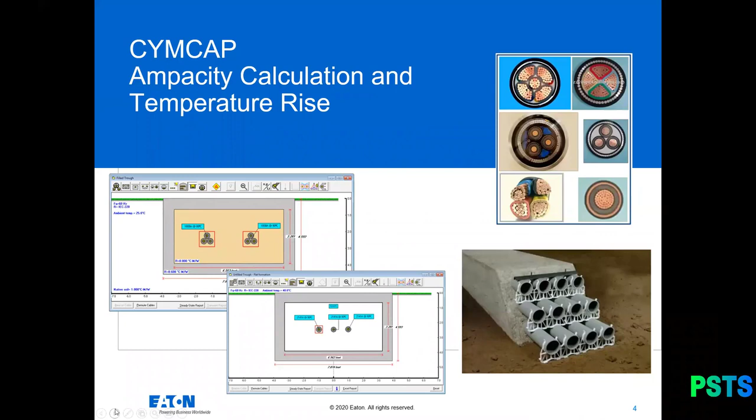Okay, so that was all for the introduction about CYME. Now let's talk about CYMCAP and dive into this topic. CYMCAP is our catalog software dedicated to ampacity calculation and temperature rise.

So, in brief, to talk about CYMCAP, what is the purpose of CYMCAP? Well, the purpose of CYMCAP is to be able to accurately model a power cable and the installation of that cable and the environment, to be able to make a proper calculation of the ampacity of that cable, the ampacity rating.

Why this is important is because it's important to understand that CYMCAP is based a lot on thermal analysis. We're looking at heat transfer, heat transferring from a conductor, a metallic element, which is going to have current flowing through it. And as we all know, any conductor is producing heat. As long as we've got electricity through it, heat is being produced. And as we also know very well, heat is the enemy of performance for any electrical component in the field.

That's really the base of this. We want to know how can we optimize the rating of our cable without reaching the temperature limit that is being set by the problem. So maybe we start with a temperature limit, and then we will look for current, or we have a current value and we want to understand what's going to be the temperature at the end of the problem. CYMCAP can play with those two parameters.

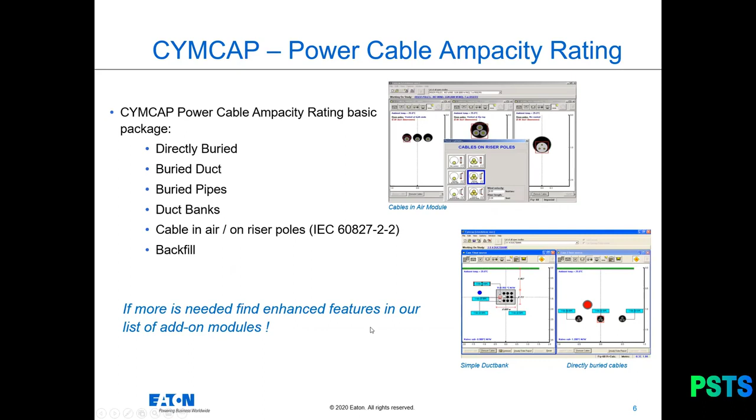So the base module of CYMCAP, pretty much we have this range of installation, which is the simplest, what we call those standard installations, from directly buried to backfill, including cable in air and so on. And I'll show more in detail afterward.

So let's take a step back and look at what is the purpose of CYMCAP again. We're emphasizing on that. What is cable ampacity rating? I'm sure many of you already know, but anyway, ampacity rating. So ampacity, that's a current, okay? And what are we looking at? We're looking at what is otherwise called current carrying capacity.

And really, when we look at a steady state aspect, we're looking at what is the max current that my cable can withstand before the max temperature is reached. So that's a simple problem in a way. At least it's pretty clear. We have a power cable, and we know the limit of temperature because I've got the cable manufacturer data sheet, and it tells me what is the temperature limit based on what my insulation layer or whatever is next to the conductor could withstand. And that temperature might be 90 degrees maybe.

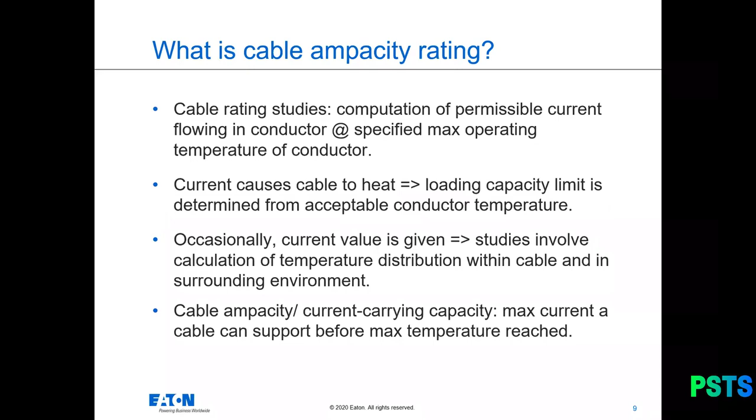So I have this data, and I want to know how much current I can have in my cable before reaching this limit. Sometimes I can look at the problem the other way around - that's something we can do in CYMCAP. Occasionally the current value would be given, so I know, oh, that specific cable, I have to run 250 ampere inside of it, but I want to know what is the temperature distribution within the cable and in the environment, because maybe my project has certain considerations - I cannot heat up the soil around the installation too much. So that's really the main purpose of CYMCAP.

What are the factors affecting cable ampacity? Well, mostly there are three things. First of all, cable construction.

As always, when you do modeling, it's a simulation - it's an image, a picture of the reality. And we need that picture to be as accurate as possible if we want the solution of the problem to be accurate as well. So of course, that's where the challenge is most of the time, is getting your base element of the simulation to be accurate. So the first thing you need to deal with is cable construction.

In CYMCAP, you have all the capabilities to build your cable: single core, 3-core cables, all types of layers. You can add other layers, you can make custom material, things like that. So there is a capability to have an accurate cable model.

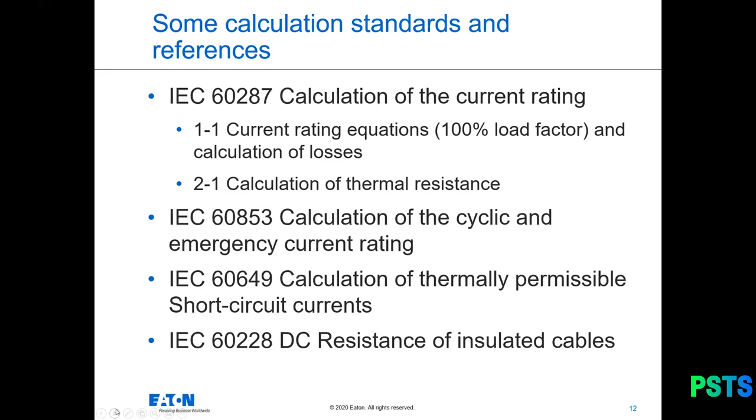And then a few others, talking about emergency current rating, short circuit, DC resistance, and so on. So I invite you to refer to the detail of those standards if you have interest. Like any standards, they are big, thick documents with many pages, so enjoy the read.

And also as a reference, some IEEE standards as well, talking about standard power cable ampacity tables. And also, we have a few papers and books that serve as reference for some of what has been implemented in CYMCAP.

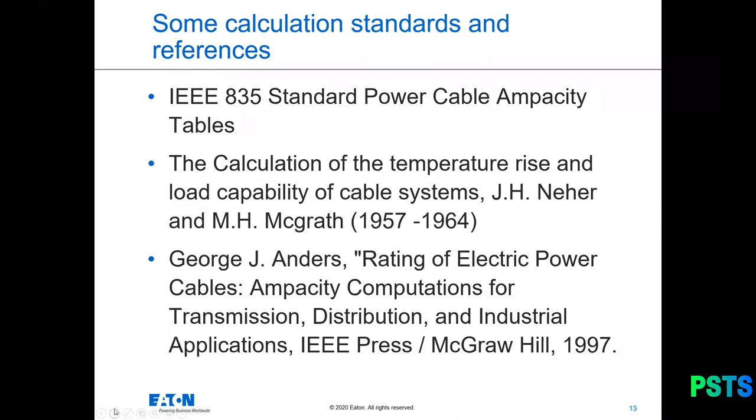And interestingly enough, especially for that third point, Mr. George J. Anders, who is one of the key persons really, and who's been a very important contributor to this science around power cable ampacity calculation. He's actually the person who worked first on the engine of the CYMCAP software. So he's at the origin of the product, and he's still involved with us, with CYME, to help us keep improving the product. So we have some very good references and solid contributions to make sure that CYMCAP keeps being ahead in terms of innovation.

One thing I wanted to mention, which I think is also interesting for all participants to take a look at whenever they have the chance. One of the most recent cases of validation of CYMCAP—because of course CYMCAP is a modeling software, and like any modeling software, the question is always how accurate is the result, how am I guaranteed that I'm actually calculating the right thing? That's a valid question.

CYMCAP from the start has been validated against measurements in the field. We already have a few utilities we've worked with in the past who have compared the results of CYMCAP with actual field measurements—checking what current versus temperature CYMCAP predicts, then going to that very cable, measuring the temperature and current value in the field. That's the best way to verify.

This has been done from the beginning, but more recently, if you're familiar with Cigre, the Cigre B1.56 working group came up with a publication—not yet officially published, but I think it's coming soon. It's basically a document discussing a set of 11 case studies, covering medium voltage and high voltage AC and DC cable systems for land and submarine applications. CYMCAP has been benchmarked against that study done by Cigre.

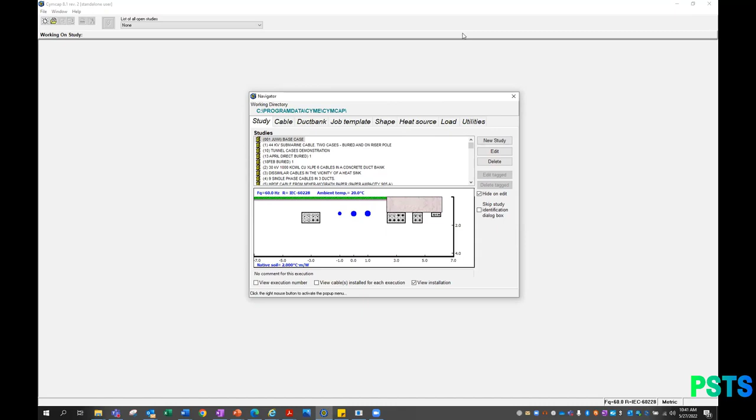When you open CYMCAP, you get this navigator that pops up on the screen—that's the one you find here, the open folder button. The navigator has a few tabs which contain all your database: the database of studies, where you have all the different scenarios you've been modeling and saving.

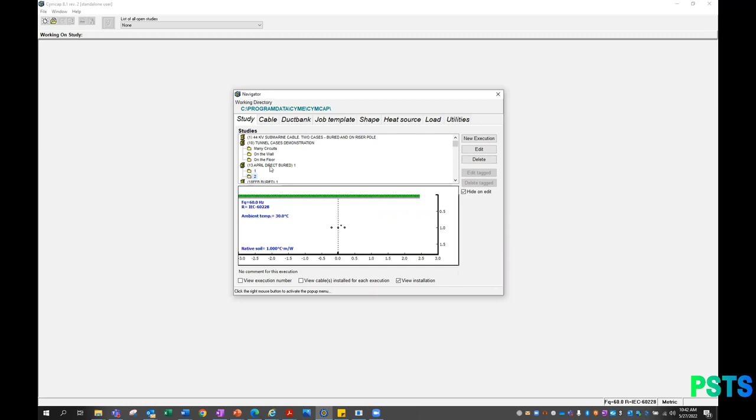In CYMCAP, how it works: we have a two-layer system where the main folder is called the study, and the subfolders are called the executions. You can have as many executions as you want under one study, and save your different types of scenarios for your project.

The next tab is the cable, and the cable is very important because it's the first thing you should work on. Needless to say, if your model of cable isn't there, you're not going to be able to start an installation or begin an analysis. You have to start with the cable.

You will see in CYMCAP that there are already cables in there, but it's not a complete database for all cables in the world from all manufacturers—that's just not feasible, since there are also a lot of custom-made cables for certain projects. But there are plenty of cables here, different voltage levels, single core, three core, all kinds of cable types, which can be used as a reference.

If you start with a cable and feel like, I've got an 11 kV cable that's quite similar to that, you could use this model, duplicate it, and create your own cable by modifying it, or start from scratch. Either way, that's the prerequisite—modeling your cable. Later I'll show you one example of the steps involved in modeling a cable. Though I'm not a cable modeling expert, I'll try my best to go through all the steps.

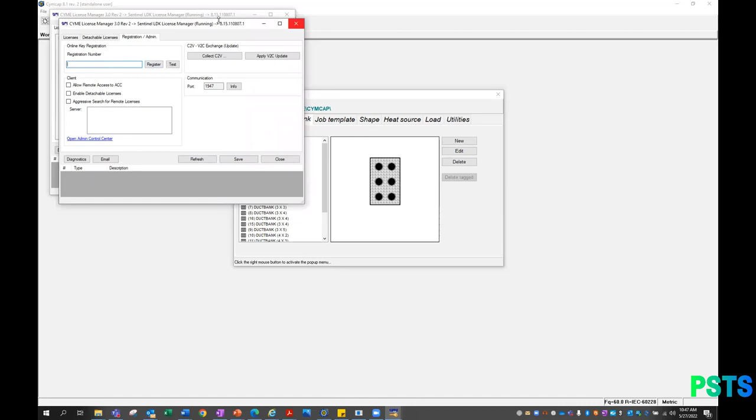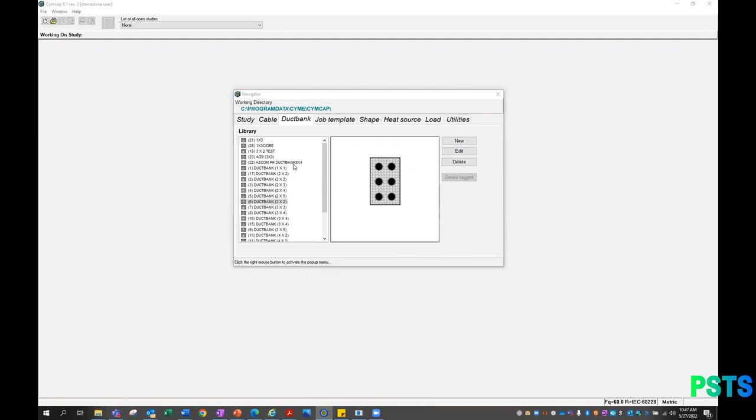So again, this duct bank tab is for defining duct bank, the geometry of the duct bank. In actual fact, anything that's material, type, filling of the duct, that kind of thing, you can define it later into the installation that you design later.

The job template is for the multiple duct bank module, where basically we define installation with different backfills, different duct banks, and we can save it as a template to reuse in other projects. So that's exclusively for people who use the multiple duct bank module.

The next three tabs, we're talking about transient analysis. I'll comment a bit more about that later. But basically, with transient analysis, we're no longer looking at steady state. Steady state is where we just run current in the cable as long as possible until we see the temperature limit, and that's it. We're reaching a maximum, and that's our solution.

But with transient, we are looking at a profile over time. We're looking at what happens if the current in the cable follows a certain profile. Maybe the thermal behavior, and the temperature, will also follow a certain profile, and maybe not reach the temperature limit, or maybe reach it, but just for a short amount of time. So that's what we want to do with those.

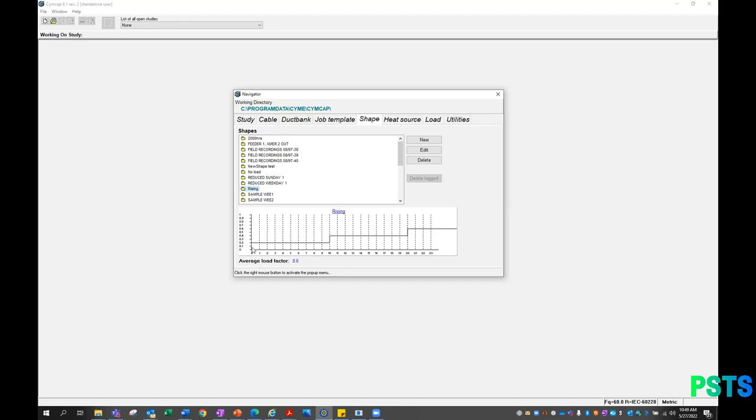We want to define shape in CYMCAP, and shape is basically just a profile over a certain amount of time with a per-unit value, a load factor basically. And those shapes can be combined in different portions to create a load profile, a different load profile. As you can see at the bottom, we can see the whole picture of the load profile, depending on what you're looking at.

If we do a load profile, it will be a current profile, so I want to say what is my current through a certain cable. But we can also do heat source, because we want to see a problem where if we're looking at a heat source in the vicinity of the installation, that heat source also has a profile. It's not always 100 degrees continuously, it might change over time.

So there's capability in CYMCAP to look at transient studies, to really look at what happened if I've got a different profile over time. The Utilities tab is all about where you save your data, quite self-explanatory - your main directory, your backup directory if you've got any, your append if you want to take a piece of database and put it into this one.

And you can also, with that tag mode enable here, if I click here, I have a location that appears here, this copy tagged to, and I can start selecting different elements in my database - model of cables, duct bank - and when I go there and apply, it just extracts that piece of database, not the entire database. So it's quite good to be selective.

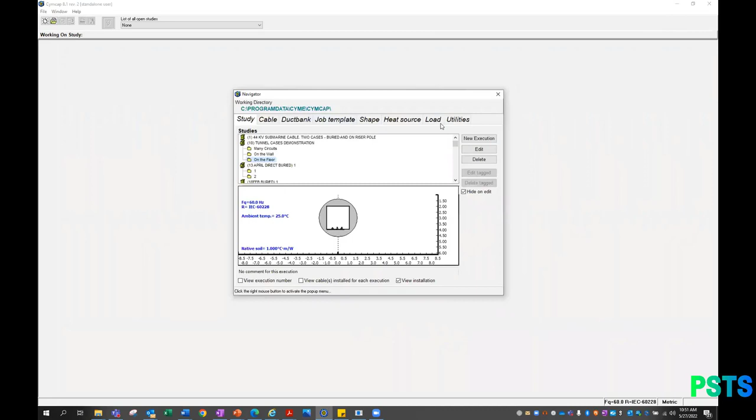All right, so yeah - can you open again the... yeah, I think I need to explain again, comment a bit. Okay, no problem.

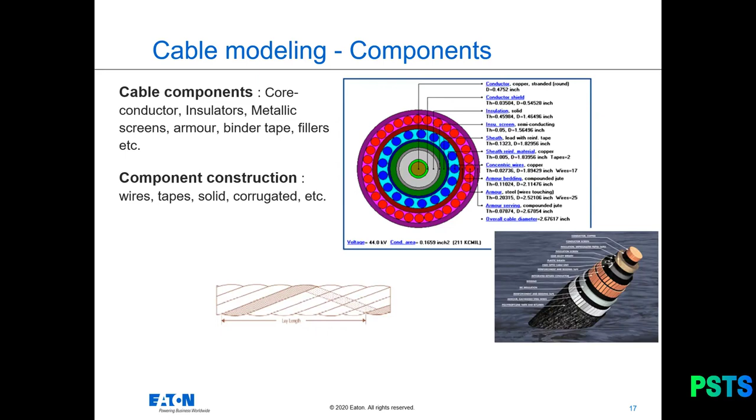And so this is very complete. We even added in some of the recent versions the capability to add more non-magnetic layers. So, for example, some of the cables that some of our users had, have more than those typical layers that we normally see in most cables. They had some additional tapes, additional small layers. So we have the capability now to put even more additional layers. Really very complete capability there.

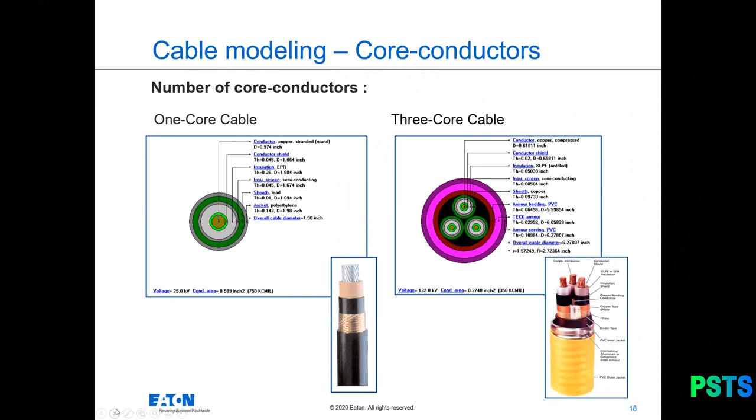So again, we can do a single core cable, can do 3-core cable. We can model different types of conductor constructions - stranded wires, round or shaped, etc. Pretty much very complete. All types of cables and conductor shape and design can be modeled.

And in order to really show you that better, we're now going to jump into a specific example. Before I do that, the example I'm going to challenge myself to show you today is this example here.

So we are looking at this single core cable, and the data sheet here - that's the data sheet from the manufacturer. The one important thing is that every manufacturer has different data sheets, has different information, okay? And sometimes they are missing information, or sometimes you may look at it and feel like, hey, this is incomplete - some of that is not 100% clear.

Of course, that's the challenge of making an accurate model - to have accurate information to create that model. Of course, if the data sheet is incomplete and you're missing information, it's a bit hard because you're going to have to make smart assumptions. And I think smart assumptions is the way to go. So sometimes some information helps you to make assumptions about other ones. Sometimes experience helps you to make the right assumptions as well.

For some specific layers, for example, by experience, we have values that work most of the time. And you also need to understand what really has a strong impact on the problem or not, because some layers - sometimes if you're not 100% sure of the thickness, but you have a rough idea - then sometimes it's not so impactful.

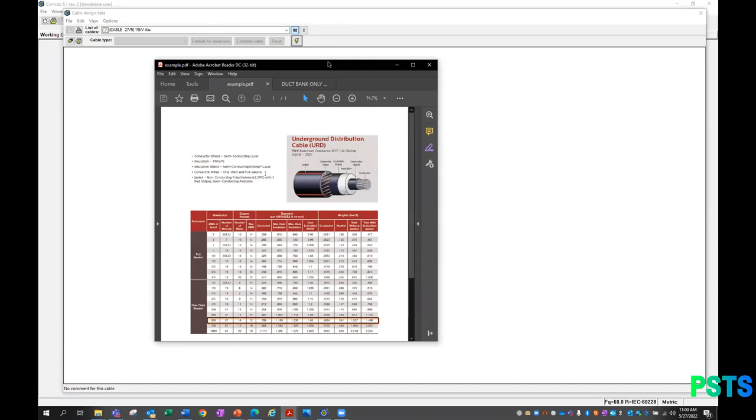All right, so this is the first screen we get. And here it's important to look as well at what kind of cable datasheet I have here. So what I'm seeing here is, as a matter of fact, the sizes I have are more from the imperial system, not the metric.

For this specific example, I have to change the unit system, but that's something you can do. If you have a data sheet that tells you things in inches and other US origin type of data, you can change the unit system. If it's metric, use metric. So here for this specific example I use that, but the steps are the same. Don't be too bothered by this — we're just talking about dimensions in a different unit system, but the steps to build the cable are exactly the same.

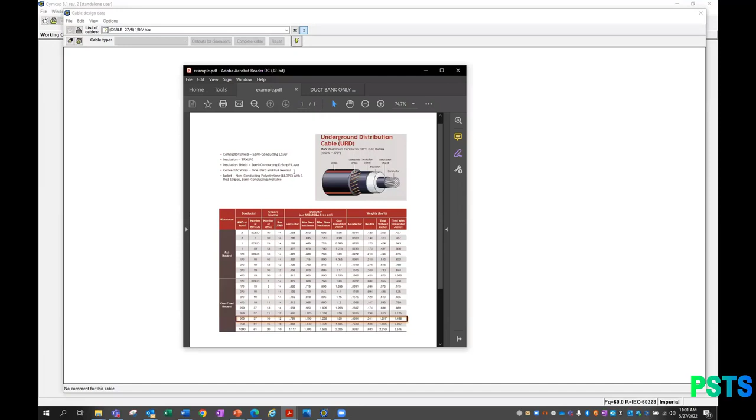All right, looking at my cable here, I've got my single core. That's the first thing I want to do — I want to pick single core. And now I've got my conductor, my insulation layer here. Okay, that's my first step.

And then I want to go here and define the cable type. I've got several selections. Through the evolutions of CYMCAP software, some things have stayed, but really today the advice I can give is that, except if you have a pipe type cable, which is very specific, or those LPOF, the low pressure oil filled cable — if you have one of those, select the type accurately. If you have something that is kind of the rest, those four here, you can put 'other', and it sort of includes everything, so it's not going to restrict you too much. So here, for me, I just select other, and that would get me going.

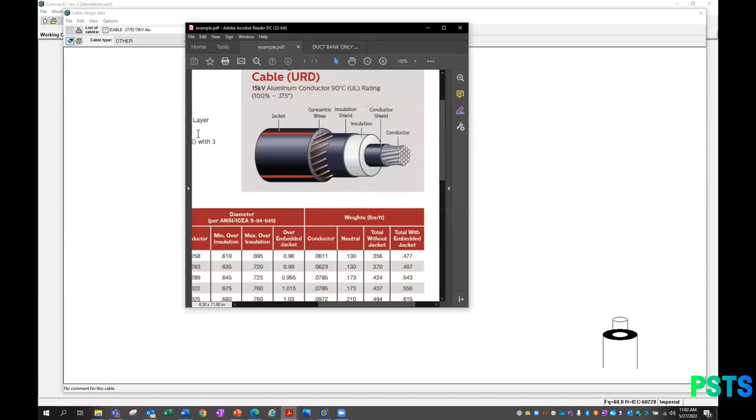Now, operating voltage. So again, refer back to my data sheet. Okay, sorry, I'm going to use that. So we're talking about 15 kV. That's fine, let's just go with 15 kV.

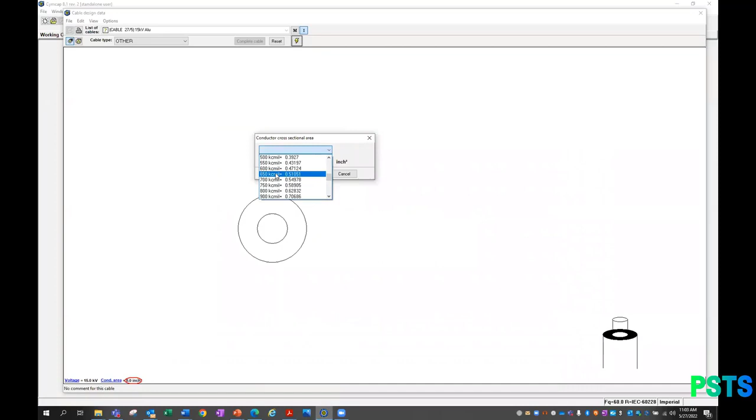And then they ask me the conductor area, which could be square millimeter, here is square inch — again, refer to your data sheet, make sure what is the unit system that you have here. So here I've got this conductor area right here, it's this 500 kcmil, which is the unit I want. So I can go here and look for my unit system, and I've got the area here. Okay, so that's the value. Again, just look for what's here — if it's square millimeter instead of square inch, you would use the metric unit system and select the right value. So I'm already off to a good start.

I've got my conductor, I've got my insulation layer, but obviously I've got more than that here. In actual fact I see that I have a conductor, a conductor shield, an insulation shield, concentric wires, and a jacket. That's 1, 2, 3, 4, 5, 6 layers, and right now I've got only 2 on my model. And even more interesting, I've got insulation and conductor and insulation. So looking at my data sheet here, basically I've got this one, the conductor, and I've got the insulation. First of all, there's something between the conductor and the insulation, which is that conductor shield. And then there is the insulation shield on top of the insulation, and then concentric wire and jacket. So do observe this, go through layer by layer, and you see the list here.

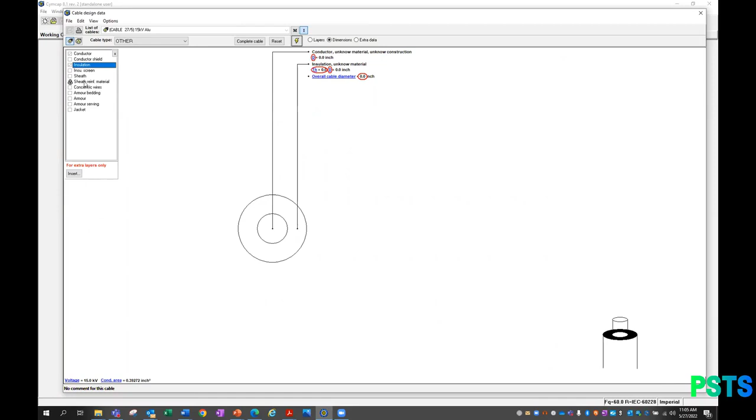First comment, sometimes the name can be a little bit different. For example, here, let's look — conductor shield. Do I find it? Yes, I find conductor shield. I check it here, and now it's being added. Then after my insulation, I've got what they call here on the data sheet insulation shield. Here in CYMCAP it's called insulation screen — slight difference. Vocabulary, unfortunately, sometimes there are no standards for the exact vocabulary, but in this example, definitely that's an insulation screen we're talking about. So I'm adding this one.

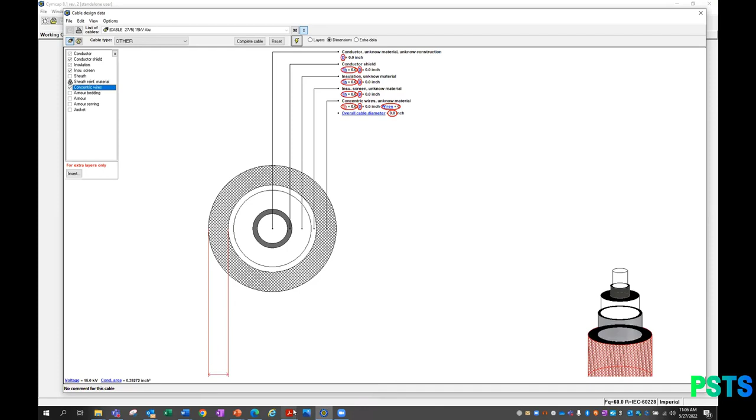And then after my insulation screen or shield, I've got concentric wire, which is a metallic type of layer, and it's what is described here as the copper neutral in this data sheet. All right, so let me go and add my concentric wire. Okay, we're getting there. And so what are we left with? We are left with the jacket. So jacket, okay, all good, is right here. Okay, so at least now, as you can see, it starts to take form, take shape. At least I think I got my layers properly figured out, which is already a good start, really good start.

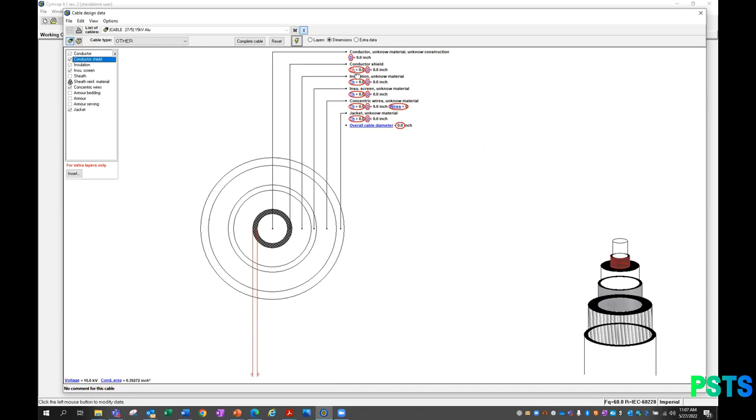So now I see plenty of those red circle things, which means what? It means I have a lot of information that I haven't entered. The D is for diameter, the TH is for thickness. And obviously, if we know the thickness of one of those layers, the diameter will be automatically calculated, or if I know the diameter, the thickness will be automatically calculated based on the previous layer. So quite often you have one or the other, and you need to inform one or the other. So let's start with the conductor first. The moment I click on this, I have this window here that pops up on the screen.

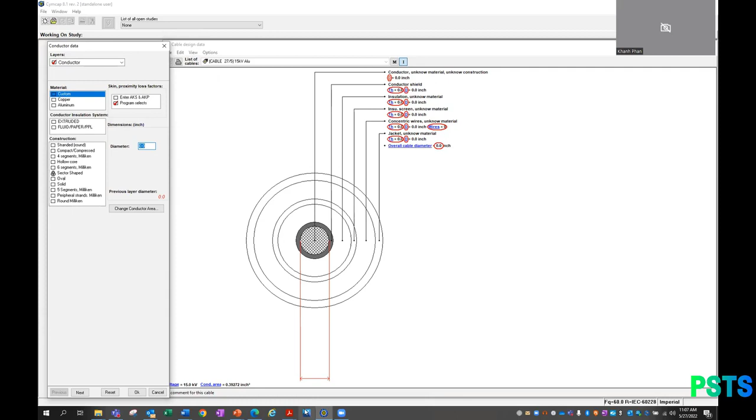So a few things to inform. The first thing is the material. And here I know that this is aluminum conductor, so I will select aluminum. If you have a custom material, no problem, click custom, and you need to have the different parameters of your material. Basically you need to inform all those different material parameters and give a name, and that's your custom made material. But here we will go with aluminum because that's what we have in this problem.

For the skin and proximity loss factors, again, if you know the values and you want to put a value yourself, you can. If you put program select, it will select based on what's written in the IEC for those specific known materials like copper and aluminum. So for me, I will definitely just follow that guidance from the IEC standard.

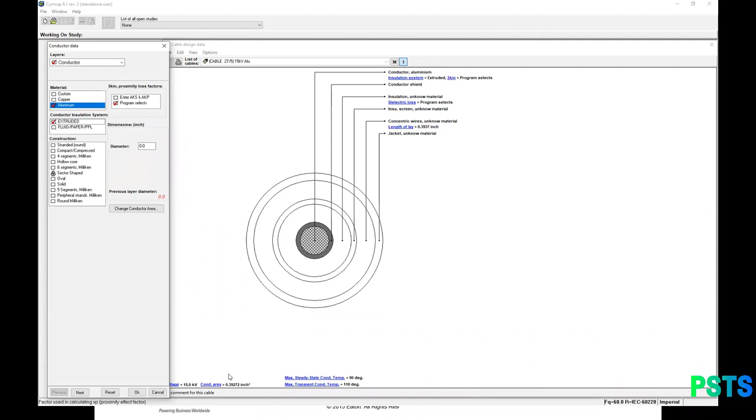The conductor insulation system, well, here that's obviously extruded. And the construction, based on my cable, that's stranded with a round conductor type, stranded. So am I done with that?

Let's see. Oh, of course, last information, diameter. So do I have the diameter? I sure hope so, because that's one of the most important information here to get me going. So diameter right here. Okay, I've got this zone of my table that gives me all the diameter, and here I've been selecting this one.

I will now go to the next layer, which is my conductor shield. Okay, like I said earlier, sometimes cable manufacturers, they like to play with us and with people in charge of doing modeling of cable, and some information is not always there. And here in that example, typically we don't find information about that conductor shield. As a matter of fact, we do not find it, but it's not unseen, okay, it's really not unseen.

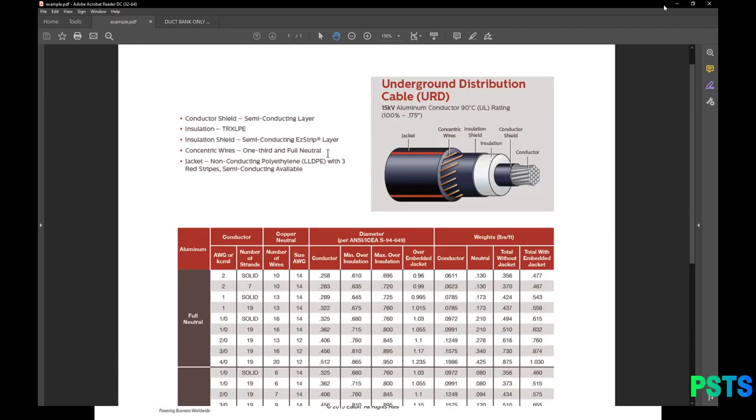So here in our example, we've got this TR XLPE, and TR stands for tree retardant, okay? And the treeing effect is something that can affect the degradation of the insulation material, and some cables are specially designed to restrict that effect. Okay, and I'm not going to explain all the theory of that treeing effect in insulation of cables, because that's probably quite a long topic in itself. But TR stands for tree retardant, okay, so to delay that effect, to reduce it. So I know that XLPE filled is what tree retardant is, okay, so I'm going to select this one.

All right, and so now, looking at the dimension. So for the insulation, sorry, I've lost my data in this data sheet. The conductor insulation, max over insulation, over embedded jacket.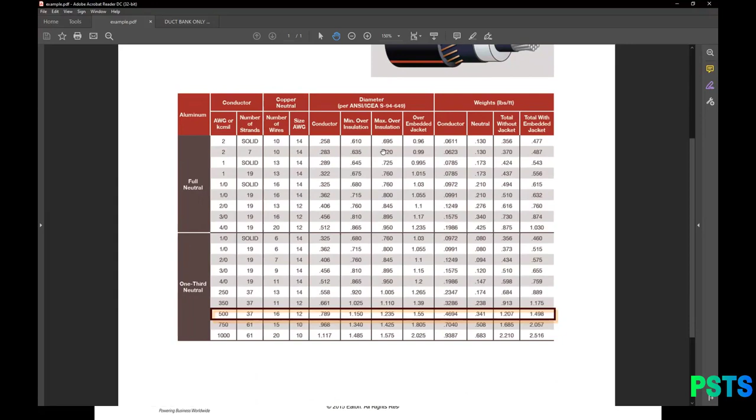Oh, hold on. Max over insulation. I think I made a mistake earlier, actually. Let me go back to the conductor. Ah, sorry, I made a mistake here. Apologies, well, I think that's what happened. You know, when you do cable modeling, you need to carefully look at the table. There are a lot of parameters, it can take some time. Once it's done, it's done. You know, but the conductor diameter is...

0.789, so that was my mistake. I took this, which is actually the insulation. So never mind, that's a good thing, I can go and correct it. 0.789 is the value I had here. Okay, this one is okay. Alright, yes, and so now that's the value I need to use for the insulation. Sorry, I put that as the conductor originally, and that's 1.235. Alright.

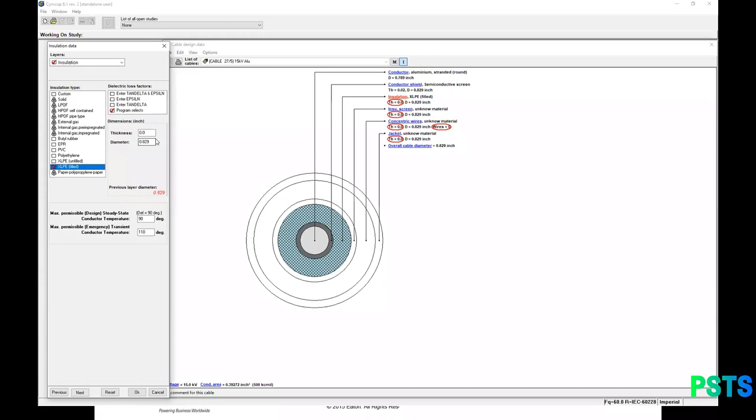Okay, I'm back on track. Good. So here, one thing to note, as you can see, we have conductor at 90 degrees, and that's the temperature limit of the conductor. That's the only temperature information we have here. As you can see in CYMCAP, we have the max permissible for design of steady state, which is 90. So that's what we have here, that's fine. You also have transient, for emergency rating, but sometimes this also is not necessarily indicated in the data sheet.

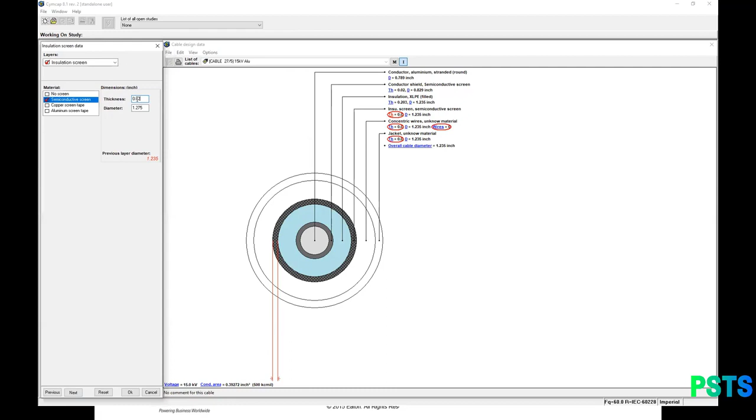So we'll use the 110 at the moment. Okay, insulation screen, same, we don't have information here about this one. And we assume the same, that 0.02, or 0.5 if we're in millimeters. The point is that those layers usually are very small and they really don't impact the result of the thermal analysis. There's been a lot of studies done on that, it's really not such an important parameter here. So when we don't have the data, we have those values that we typically use.

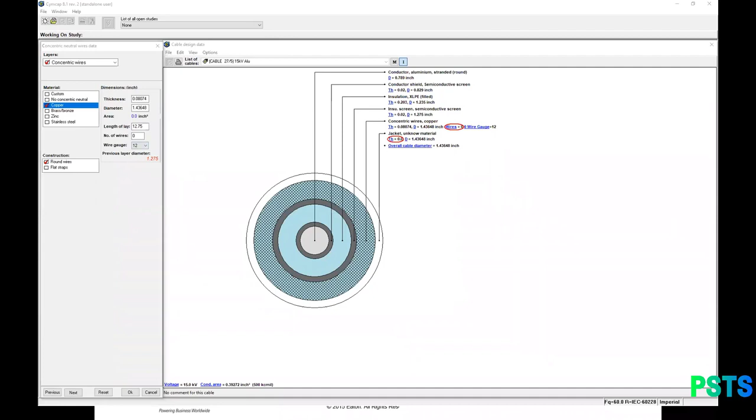Okay, concentric wires. So we've got a copper neutral, and it's a round wire type. If we look at this data sheet, the type of information we have about the concentric wires, we have that copper neutral, size gauge 12, which here is convenient because we can just put it here and that will calculate the thickness and the diameter, quite a standard size. And I can put the number of wires. Something I can do here, I think that's information that's here, 16 wires, so I can put it here.

There you go. Alright, I'm pretty much almost through, so it's just my jacket which is remaining. And then the jacket, you need to look at what is the material of the jacket and put the right material. What we're interested in is, of course, the final diameter of the jacket, which is 1.55. So I'll put here 1.55 as my diameter. And here, I believe that's this, yeah, polyethylene jacket. And I'll click OK, and guess what, we have that cable modeled as accurately as we could with that information.

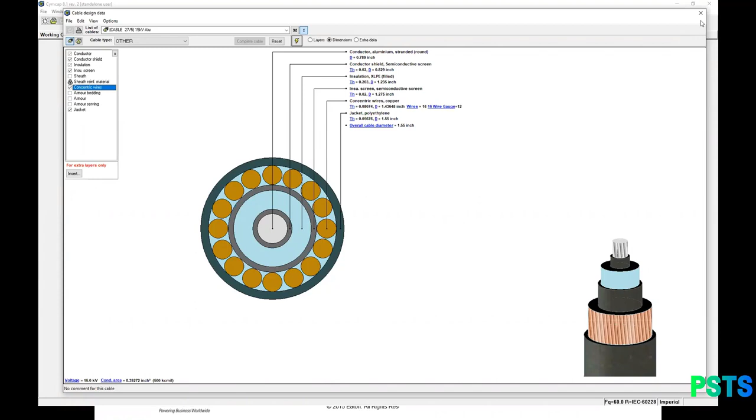So that's how you go about modeling cable in CYMCAP. Alright. So I will send you this data sheet if you'd like to go through the steps again, to try and see how you can get to the same result, and so that you can look at the parameters. More than happy to share that with you.

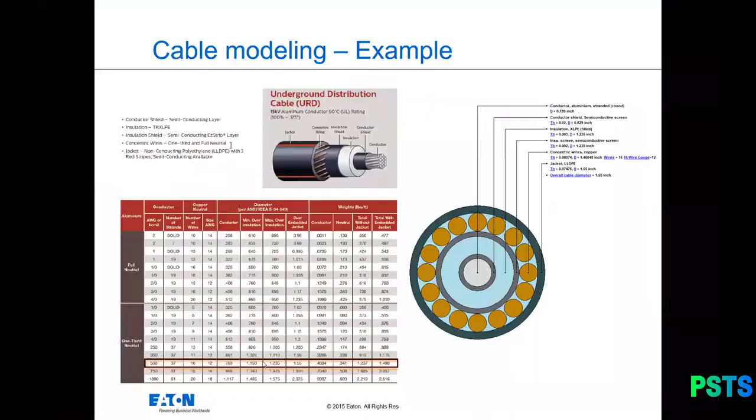Alright, so let's get going, I still have quite a lot of things to talk about. So, modeling capabilities. Now talking about, after the cable, talking about the installations.

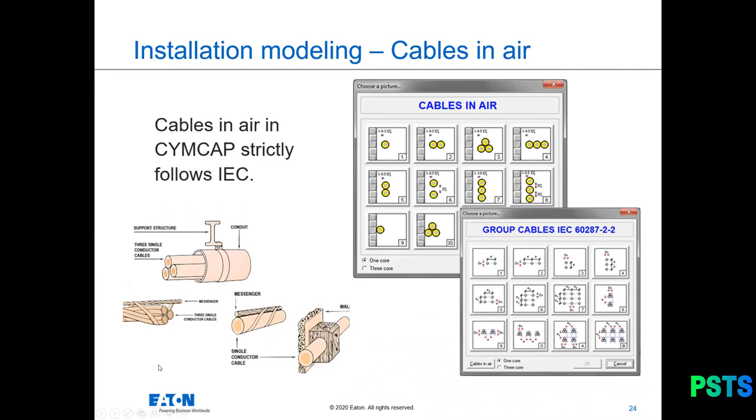We have cable in air capabilities. For the cable in air, though, you need to watch out for the restrictions set by the IEC 60287-2-2, which has a very specific group of installations. That's what CYMCAP does for cable in air, we can't do designs that really go outside of that, just because the standards haven't been written on it. So that's the bit of the restrictions here. Same goes for cable on riser pole, which are also cable in air type situations. So you've got the riser, which is bringing that cable up, and this can be modeled as well in the cable in air.

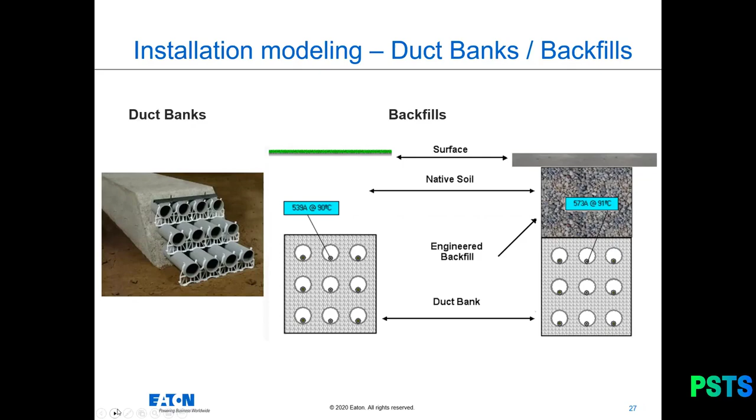We can do cable in casings, which could be underwater in the seabed, kind of buried under the layer at the bottom of the sea, or it could be in the water, hanging there.

We've got cable in tunnels capabilities, those large tunnels, which could be ventilated or unventilated.

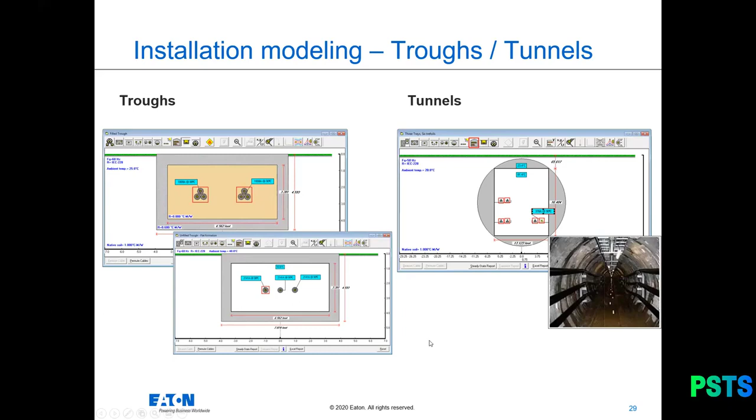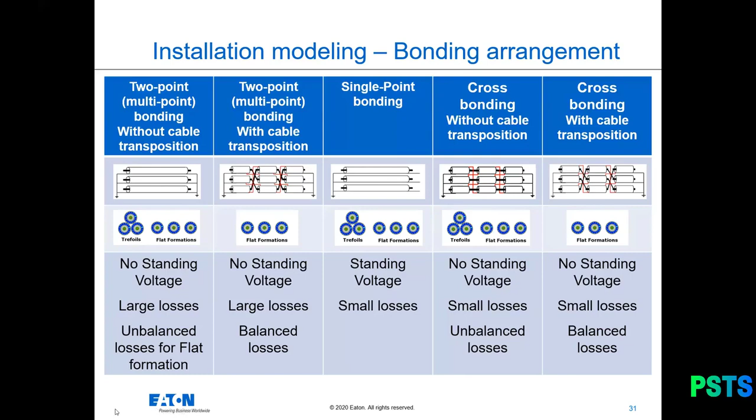So now looking at analysis capabilities, different ways to look at the analysis in CYMCAP. The starting point is steady state. We have an initial condition, we run the current, and we go to that stable, steady condition, and we look at what's the temperature we reach, and that's pretty much it. This is steady state, going to 100% load factor, and just looking at when do we reach that temperature limit.

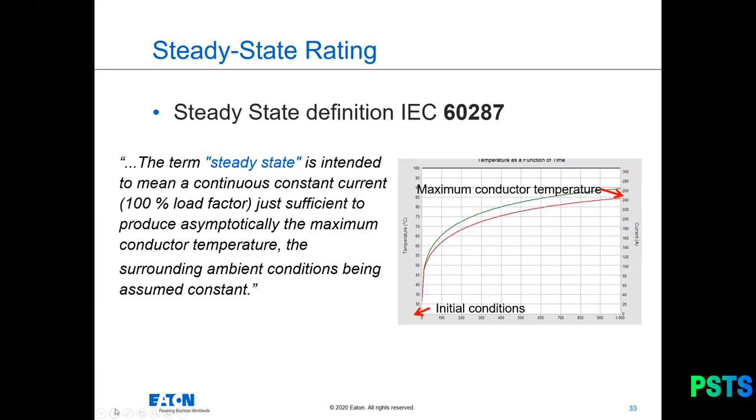And in CYMCAP, in steady state, we have different things we can look at. We can actually reduce the load factor and put less than 100%, which they call daily cyclic loading. So it's still a steady state, but you just reduce the value of the load factor to less than 100%. And we also have 3 different types of solution: what we call ampacity, equally loaded or unequally loaded, and then temperature.

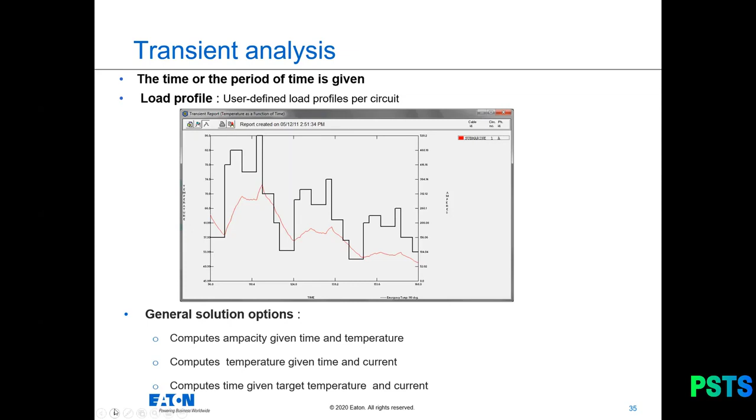Another thing you can look at also is temperature field calculation. So you want to know what is the impact in terms of temperature rise in my environment, how much the ground is gonna get hotter around the cables. That's something that can be done also.

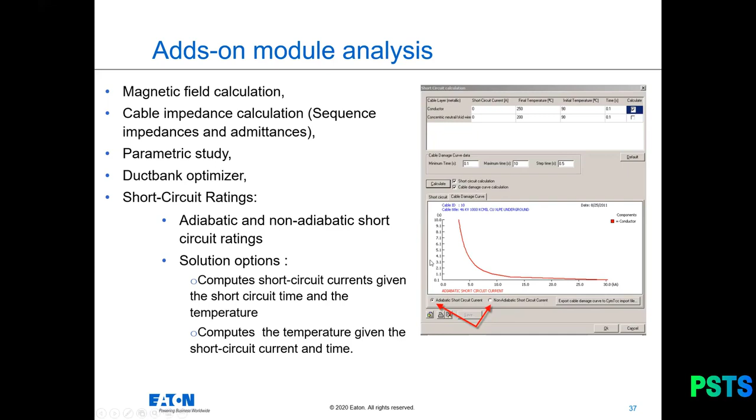And again, in terms of analysis, you can complete that also with all those add-on modules that we have. If you want to enhance a specific type of analysis, get magnetic field calculation, get more cable impedance calculation, parametric studies where you change parameters and look at different results. Duct bank optimizer, you want to optimize the position of cable in duct bank. You want to get short circuit ratings. Those are things that you can do.

All right, so we'll jump again to the software so that I can show you a bit of installation, modeling, and analysis. My plan is to show some directly buried cable and potentially using also the multiple duct bank to see how to model something like this based on different layers of soil, different resistivity values.

That's an interesting scenario to model—look at what is steady state, what is parametric. Transient probably won't have time for that. Temperature contour reporting. So let's get to it.

We'll start and see how much I can show you. So first, when starting a new study, the software will ask if you want to use this study as a template. You don't have to—you can say no and start from a blank sheet, from scratch. Or if you want to use this one and modify it, you can. To me, I would start from square one.

I'll do a burial dated 27 May, and that's my title 1. I don't have to put anything else. Execution title is important, so that's my execution number 1, and I just put 1. You can be more detailed, obviously.

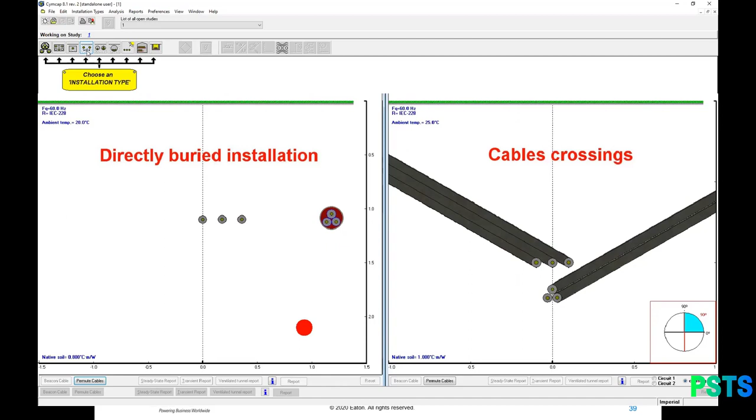Now I want to do a directly buried installation. You can see those screenshots showing a little bit what the possibilities are: directly buried, a cable in a pipe (pipe type cable), adding a heat source, or potentially cable crossing. Anyway, I'll start with this.

Environmental parameters—let's go through it. It's important to put the right ambient temperature, the native soil thermoresistivity, which here is put as 1, but it could be a totally different value. You need to consider and modify those environmental parameters. I'll keep the default value for now.

So what do I get next? I get my cables—what are the circuits I want to introduce in the design? I've got standard, 1 cable 1 phase, or multiple, which could be several cables for 1 phase. I'll take standard, and I will put 1 3-phase single core cable, and we'll look at a flat formation, something quite easy.

I could change some of those parameters, like the power factor, and so on, but I'm not going to do it here. Conductor temperature—you could change the limit here as well if you want to consider a specific value. Right now, I'll leave it as 90 by default.

So what happens next? My installation data here—I've got those 3 phases that were added at this place. I can go into it, double click, or go into edit. If I go into edit and select only phase A, for example, I want to take my 25 kV cable at the top here. In the installation, you will see absolute coordinates, X and Y.

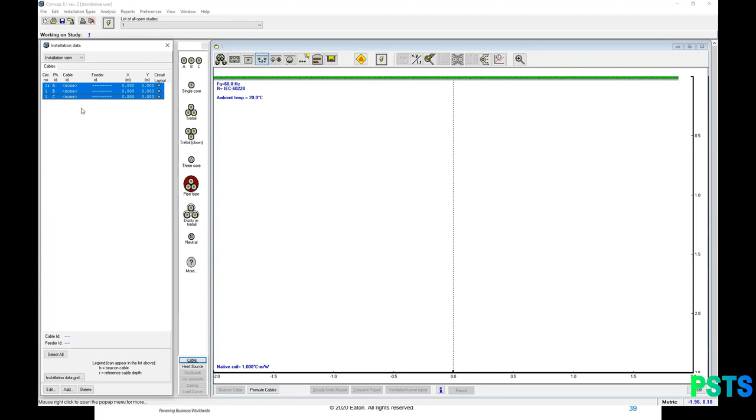So here, if I select the 3-phase instead of 1, when I go to edit now and get my 25 kV cable at the top, the installation becomes more interesting. The coordinate system is defined as a group, so I'll define my most top left cable position, which by default is phase A—that's how the software does it. You can change that.

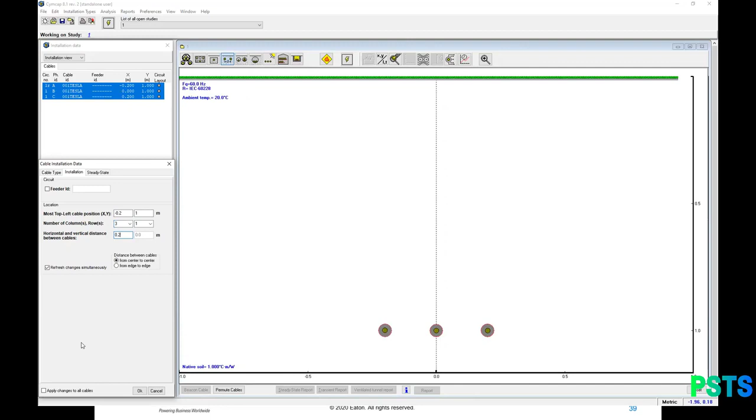I will put it as -0.2, and the depth I will put at 1 meter. Because I want flat, I will put 3 columns, 1 row. And then I need to tell the distance between the cables, which I will put as 0.2. Okay, so I've got my 3 cables.

All right, so this has been positioned. By the way, if you're wondering, this is a drag and drop option—I can take a single core cable, bring it here, drop it here. Another option: you can also just go here, add a circuit, my single core cable circuit here, and define coordinates. Both are okay—you can do both.

Now, am I good to do a steady state? Well, if I click on steady state, it's going to tell me no—you have to complete the specific installation data. Specific installation data is right here. This is installation, my cable, my coordinates. This is specific installation data.

And that is all about bonding arrangement, first of all. Is it bonded at both ends? Is it a single bonding, etc.? So I can put single bonded. And well, I'm pretty much good to go once I've done this.

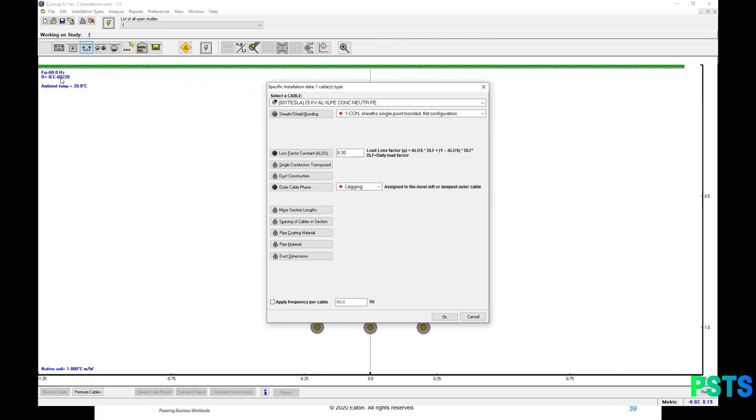Interesting point: you could change the frequency per cable. So if you've got a DC cable, you can put 0, and that's going to consider DC. Or even if you have AC but a different frequency, you could change the value here. If I don't change it, it keeps 60 Hertz, which is my system frequency by default, but I could change it to 50. So if I go here, I click, I can change it to 50 Hertz right in the corner. And now when I go back, you can see 50 Hertz is the default frequency.

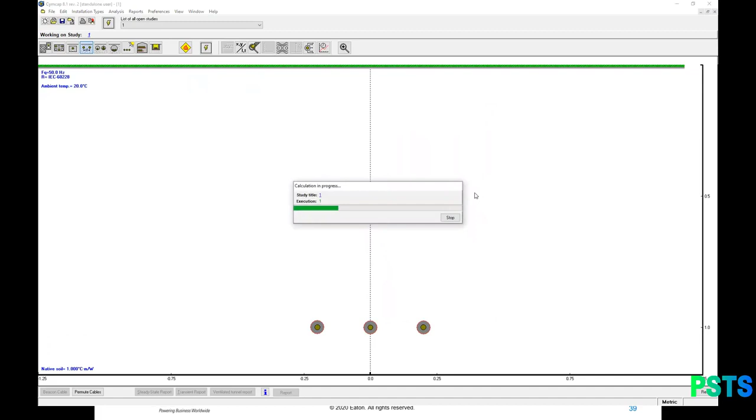All right, so I click on solving, and I'm going to get that steady state result. And that's it, I got my temperature value and the current associated to it. The middle cable is the one reaching 90 degrees first, which is not surprising because it's got the impact of the two other cables.

You've got a report button at the bottom here. If you click on it, you could have the CYMCAP report viewer or Microsoft Excel. The CYMCAP report viewer is a nice way to quickly see the report, which has been introduced recently. So I could put the electrical parameter, the cable input. You select what you want, click OK, and you're going to get that reporting coming up. There you go, different tabs, different parameters. So it's a pretty complete reporting.

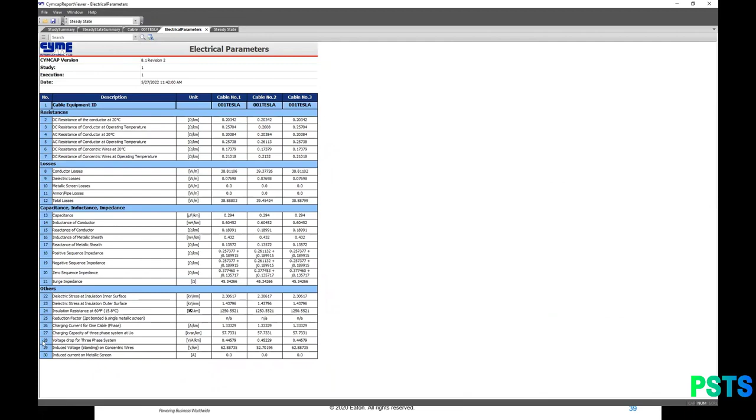Takes a little bit of time to be generated, there's a lot of parameters. And once you have this, you've got your electrical parameters, induced voltage, induced current, losses, steady state summary, study summary, etc. So it's a very complete reporting.

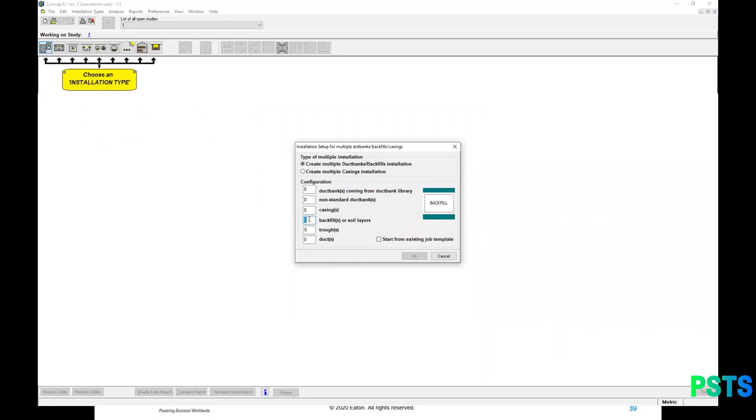So if I do a new study and call it MDB test 27.5, okay. Now this time I'm going to go to the multiple duct bank module, which you can see contains all this kind of potential design. In my example, I'm going to say I've got 2 backfills: one for my buried cable, one on top, and then the native soil. Just to make a simple scenario, not exactly like my drawing just now, but close.

So how does this MDB module work? Here, environmental parameter, I don't touch. And here I will want to put... just to show you how to do that. So here I've got trefoil, pipe in trefoil actually, it's not trefoil in pipe, it's pipe in trefoil, which is important, it's different. So that's actually this one, ducts in trefoil, not pipe. So I'm going to have one, and I'm clicking OK. So that's fine, and now I've got two tabs: I've got my cable and I've got my backfills.

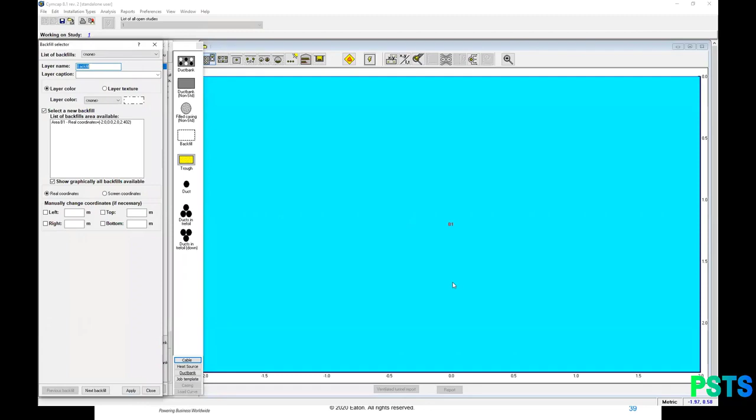So what do I want to do? I want to go here first and define a first backfill installation. When I go here, I have one area called B1, which is my backfill area. I can start defining it. Let's say I want to define the first layer, which is on top of my backfill with the cable inside, so it's my backfill number 1. I'll start adjusting the dimension a bit. I can put 0.5 meter on the right, 0.5, and I'm going to say it goes down to 1 meter, let's say.

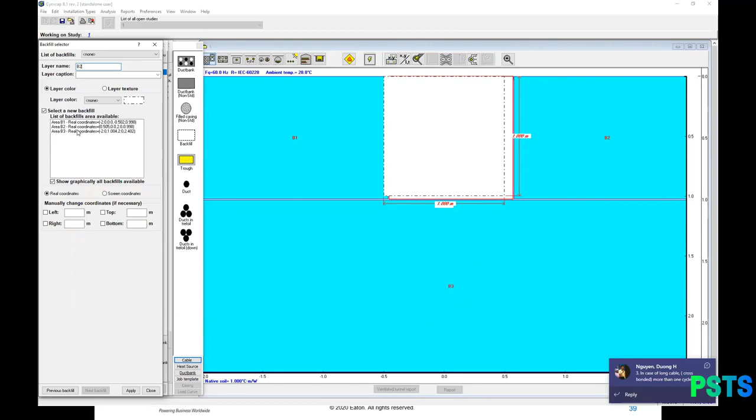Okay, then I go to the next backfill. I can do B2, and I want to put it right under, and that's going to be where my cables are going to be. So right under, you can see B3 is the area I want. So I'm selecting B3 here, so I can define a backfill around here, and I'm going to adjust, again, left and right about the same dimension, because that's a trench, what I want to design. And it's going to go to, let's say, 1.75 meter. Okay, I apply that.

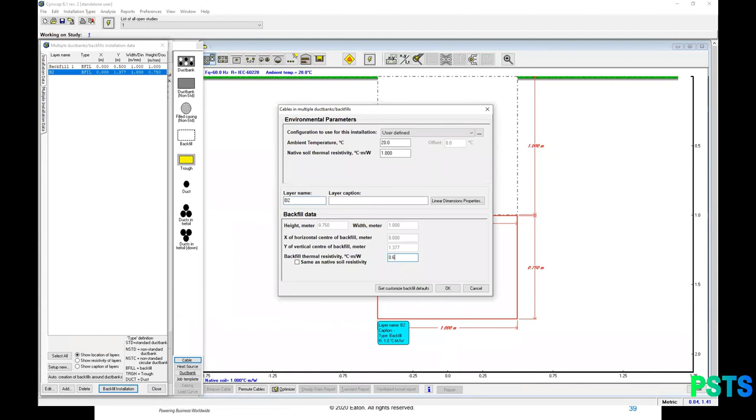Okay, I've got my two backfills. And by the way, thermal resistivity of the backfill here by default has been put as 1, but if that was something like 0.9, I adjust it. And for this one, it's 1 as well; if it's something like 0.6, I adjust it. Okay, now I've got 0.6, 0.9, and 1 is my native soil.

So now, how about cables? Cables, I want to put them inside of this backfill, right? It's important to first select the right backfill, okay? Where do you want your cable to be, this backfill with the red frame, or this one? Well, if you want this one, select this one. Then we go in here and we define, again, let's take a different cable, maybe that's 15 kV.

Let's define the coordinate of the trefoil, which, as you can see, we define the center of it. So I'll put it at 0.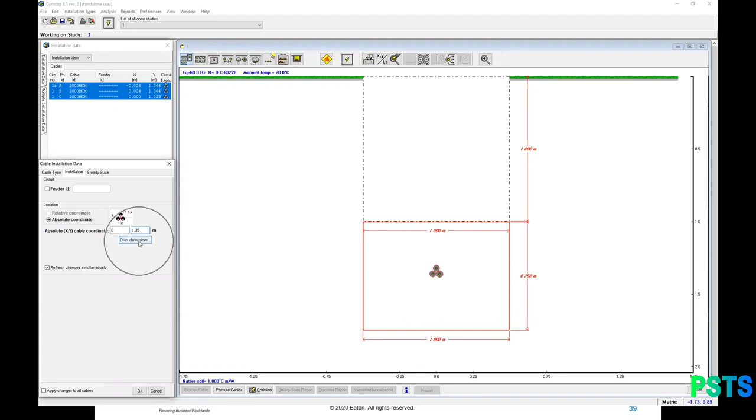And the depth, I'll put it somewhere here, say 1.5, or 1.35, more towards the middle. And here I've got a duct dimension, so I can define dimensions for my cables in the trefoil. You can define the diameter here, or use some standard size. To make my life easier, I'm going to do that. I took size 3, and as you can see now, I've got those ducts, and that's what it is.

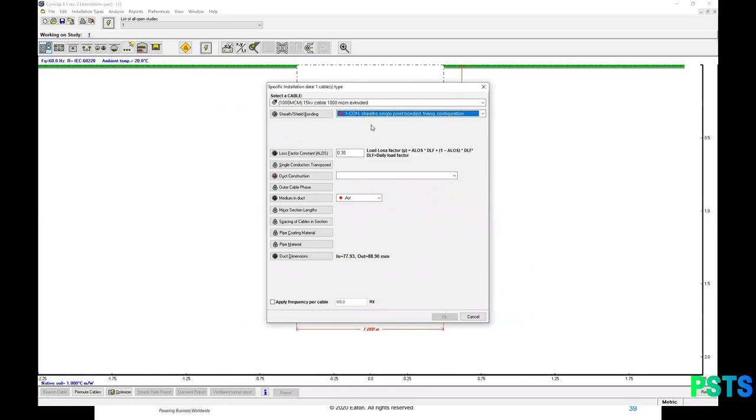Okay, so in just a few clicks, I got 2 backfills into the layer of native soil and my cable in ducts. And now when I go to specific installation, which I need to define, I'm going to define the bonding, which I can do - I've got different options available. I will just pick any of it at the moment.

Duct construction - that's an important question. Is it a custom material, or is it something like PVC duct in concrete, or buried? I'm going to take that; PVC is quite widely used. And what's inside of my duct? Is it air? Is it water? Is it a solid duct fitting? You have the option. So here I put air, but you could change that.

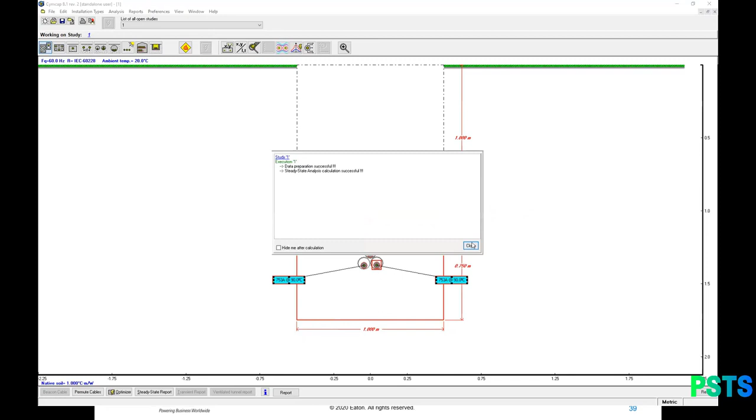And now do I want to go in here and solve it? And pretty much, in very quick - just a few clicks - I've been able to model a reasonably complex installation, because we've got 2 different layers of soil plus the native soil, so we have 3 different thermal resistivities. We could also change the thermal resistivity inside of the duct. That makes the problem - if you had to do that manually and calculate it by hand, that's a lot of things to check.

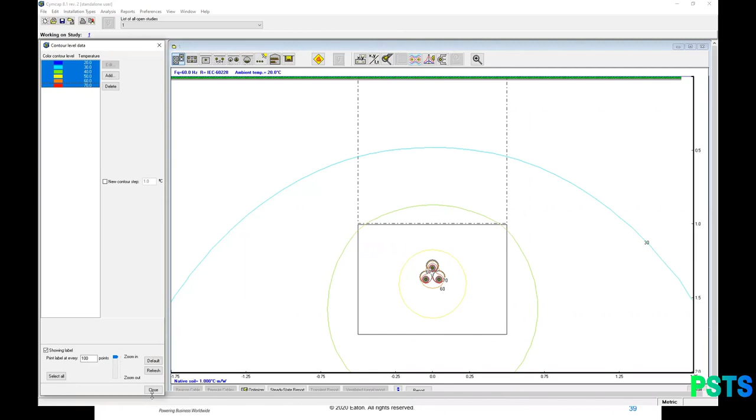And finally, if we look at the temperature contour - well, as you can see, I've just clicked on this here, select my different values, and I got it here. I've got my different lines of temperature around the installation, and I can just go back to my Ampacity result.

That's all for my demonstration here. I want to leave some time, and I know the time is running fast. I didn't have time to touch the transient 3D or the parametric study - these are things that you can discover with the trial as well. So I invite you to explore, and if you have questions, we're more than happy to help with that.

All right, Jong, I'm done with my demonstration here. Okay, let me summarize again for some people in this. Can you come back to the catalog first, for the cable catalog? Oh sorry, the data sheet of the cable. Yeah, okay, sure, I will start from this.

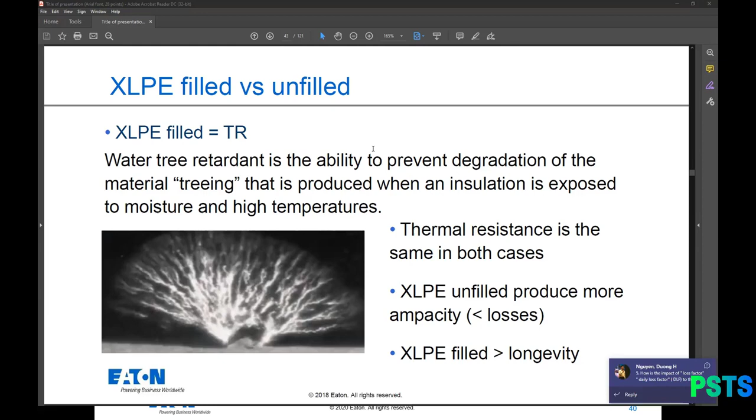Does that make sense? Yes, okay. I think it makes sense.

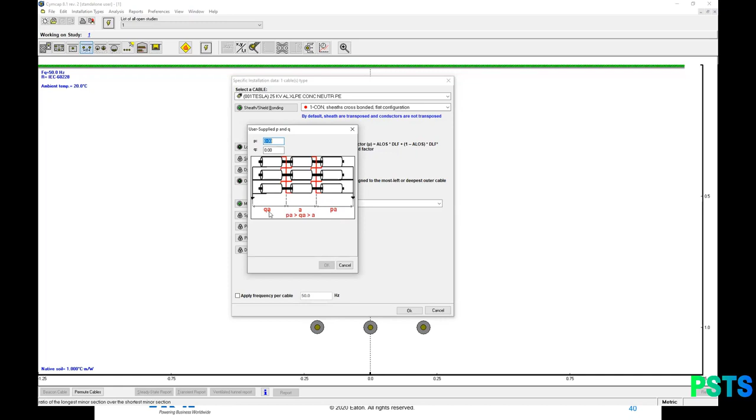Absolutely. Well, if that's a good understanding of the question, that's the answer. Yes, you can do the cross bonded, and you can define user supplied P and Q values. You can see those P and Q parameters as defined here, where you've got the A value, which is the length of the section, and here you've got a factor Q with that factor A, and so on for the factor P. So you have to enter the values here.

So yeah, can I understand that the QA or the A is like the length of one cycle?

Well, yeah, and I'm not sure if length of a cycle is the right vocabulary, because honestly I don't have that knowledge of this term, but here it's showing when the crossing of the bonding is happening, and where it's being located along the cable. So yeah, you can adjust different lengths for that.

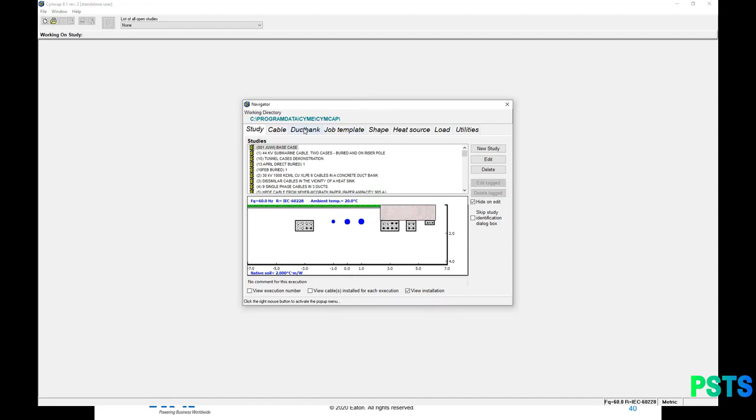Okay, the last question is about how the impact of loss factor, or daily loss factor, to the ampacity of cable. Daily loss, the loss factor. I'm trying to think where we have that parameter. I think it is like the shape of the history. It is like, no, it is like the variable of load during the day.

Yeah, if that's what it is, definitely. You probably will find information about losses in the report. So I don't know, I'm trying to understand how the question is turned. You have information about losses, so depending on what you're studying, is it a steady state with 100% load factor? You'll find information about the losses in the report.

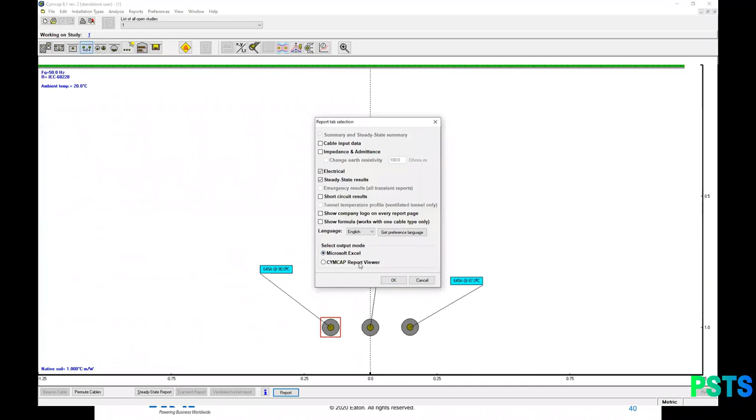So if I would do a, sorry, I close it now and I cannot find it anymore. Oh never mind, I can just reopen that. It's got to be, yeah, if I just solve this directly buried, very similar to what we've done. Inside the report, you will see all the loss information. So there's really one tab on the electrical that's going to talk about losses.